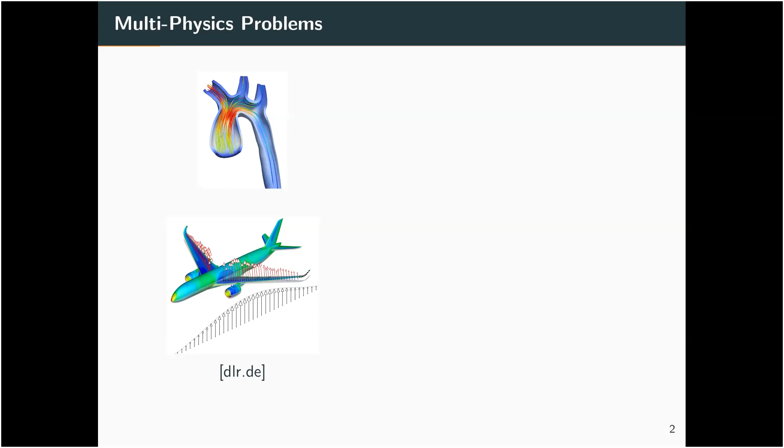Okay, let me start directly with multiphysics problems. These investigations study phenomena where more than one physics is involved. Here I have two examples. In the first example, we see the blood flow inside the human aorta. There we have the blood flow, which is representative of the fluid domain, and the aorta wall, which is the solid domain. The second example is the simulation of airflow around aircraft wings.

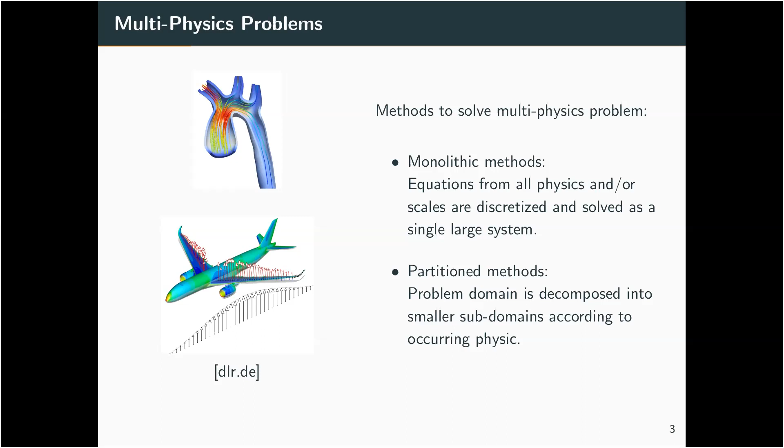To investigate these kinds of problems, there are generally two groups of methods: monolithic methods, where equations from all physics and scales are discretized and solved as a single large system. On the contrary, there are partitioned methods, where the problem domain is decomposed into smaller subdomains according to the occurring physics or scale, and for each subdomain an independent solver is used, and a coupling method is implemented for data communication between different solvers. We follow a partitioned method.

There are very good reasons to follow such methods. The first reason is that these methods give greater robustness and flexibility for software development. We are able to use well-adapted and validated numerical methods for each subproblem by using a partitioned approach. Also, previously developed and optimized single physics solvers can be reused here. Together these reduce the software development cost significantly.

We have some challenges when we use these partitioned approaches. The first challenge is that we need parallel single physics solvers. If we want very efficient simulations, the single physics solvers must be optimized at the first level. The second challenge is intercode data communication. Communication plays an important role in partitioned solvers because the boundary data must be exchanged between solvers, and efficient data communication is a key point here.

Boundary data mapping is also an important issue because not all solvers use the same mesh. Different meshes can be used by different solvers, and if those meshes are not matching, then we need to map the data between different solvers. Then there is equation coupling for strongly coupled simulations, where we have to use an iterative procedure for each time step. Without an acceleration scheme, the iterations can take forever. So this is also a very important issue.

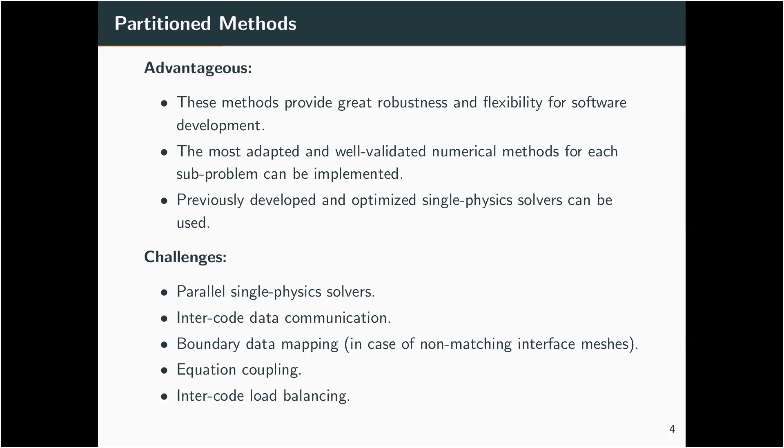And finally, intercode load balancing, which I'm addressing in this presentation. This is a different issue from what we know from classical load balancing inside a single physics solver. It says basically: if you have, for example, 10,000 CPU cores and two solvers, how should you divide these cores between your solvers so that it minimizes the idle time and maximizes the efficiency? In this presentation, I'm going to introduce a data-driven approach to address this issue.

Our goal is to design and implement an efficient core distribution scheme between solvers to minimize the waiting time. As I explained, in a partitioned simulation, available compute resources, meaning CPU cores or GPU cores, should be distributed among coupled solvers. You have 2 or 3 single physics solvers, and you have, say, 10,000 cores. You need to distribute these cores between your solvers. For partitioned simulations, solvers typically exchange boundary data at the end of each time step or iteration.

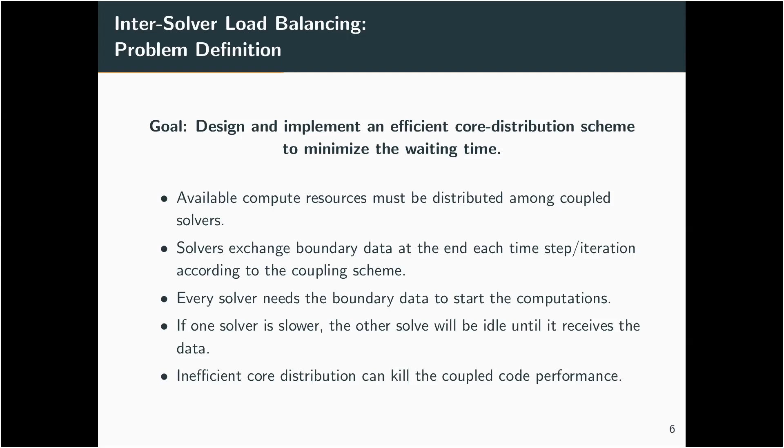This means that every solver cannot continue until it receives the boundary data from other solvers. If one solver is slower than the other, the faster solver will have to wait until the slower solver finishes its work and sends the data. This can kill the performance of the coupled framework if the distribution of cores and load balancing is not ideal. Therefore, I introduce a data-driven approach to address this issue.

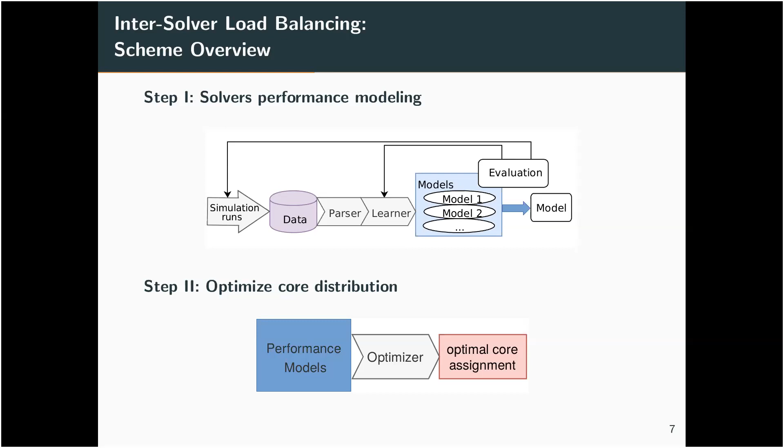The proposed scheme consists of 2 steps. In the first step, we model the performance of each solver. For this, we gather some performance data from small simulations, and then we use performance models, and by optimizing these performance models and choosing the best model, we select a good performance model for each solver. After finding good performance models for each solver, we can incorporate these models into an optimization problem to calculate the optimal core distribution between different solvers.

For performance modeling, we use PMNF, performance model normal form, regression. We use the method from the paper that I cited here in this slide. This regression suggests that we use such a formulation for modeling the performance of each solver. Here, F is the runtime of the solver, and P is the number of cores that we use. We can use different terms for the performance modeling. As I explained, F is the solver runtime, P is the number of processes, N is the number of approximation terms, C_k is the weight for each term, and i_k and j_k are empirical coefficients.

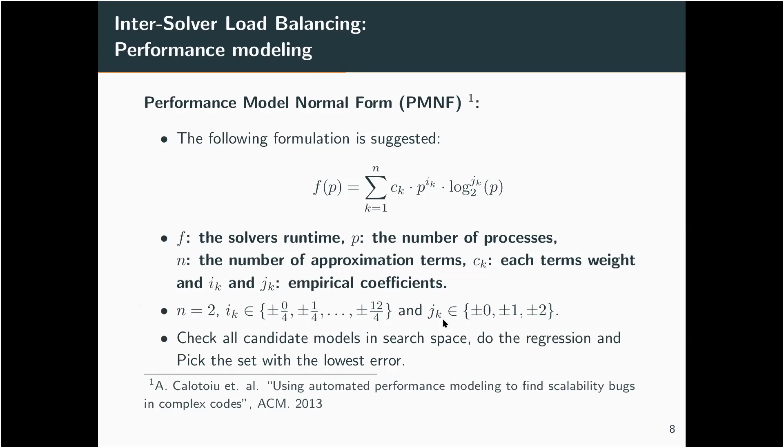For N and IK and JK, we can use this space. How we choose a good model is that we check all the combinations of N, IK, and JK, and just pick the model with the lowest error on a validation data set.

Okay, after finding the accurate performance model for each solver, we define our optimization problem. Here we want to minimize the capital F. The capital F stands for the total runtime, which is a function of the core distribution between solvers and other parameters. And we have one condition here: the sum of all cores assigned to all solvers should be smaller than the available number of CPU cores. This is an obvious condition that we have here.

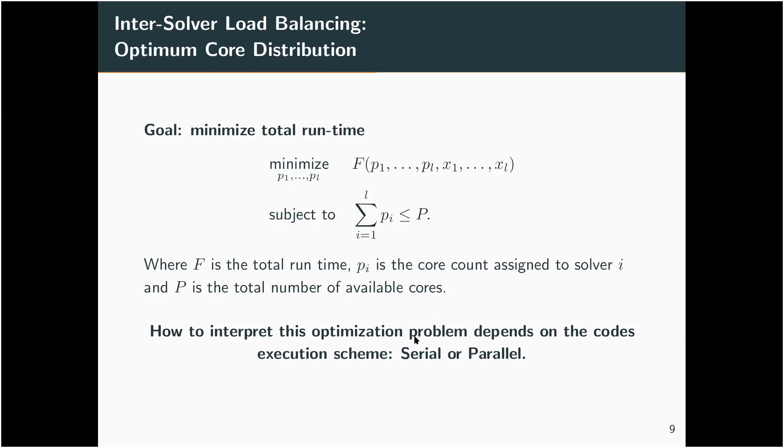On the other hand, if we execute the codes in a parallel fashion, then both solvers run at the same time, and at the end of the iteration, they exchange data. This also can be explicit, where no iterative procedure is taken, or it can be implicit, meaning that we have to iterate the simulation at each time step until it converges. So in this case, F is defined as the maximum of F1 and F2. Basically, it means that we should minimize the waiting time of one solver. This means that the different solvers should have runtimes as close as possible to each other.

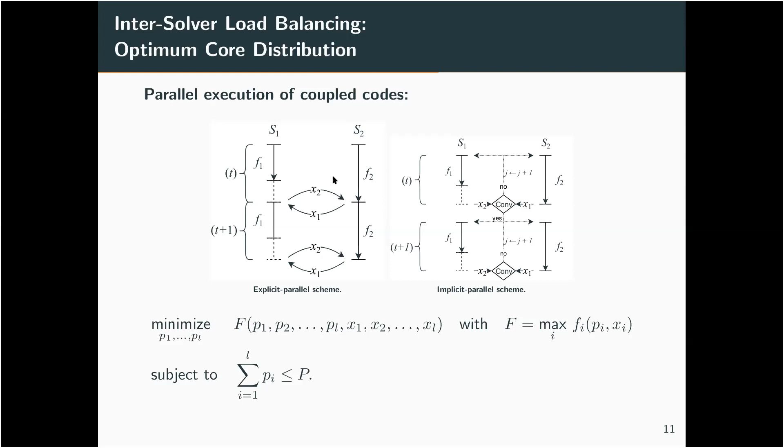Okay, now after defining the optimization problem, let's see how we can solve it. The point is, Fi's are not generally monotonically decreasing. This means that we can increase the number of cores, but the runtime of the solver can increase if it is outside the scalability region. In this case, the optimization problem can be a nonlinear, possibly non-convex integer optimization problem. If we limit the number of cores to the scaling range, then we can assume that Fi's are monotonically decreasing.

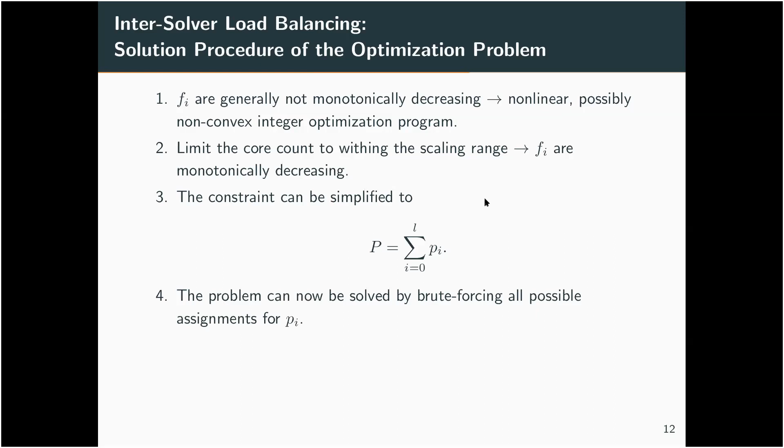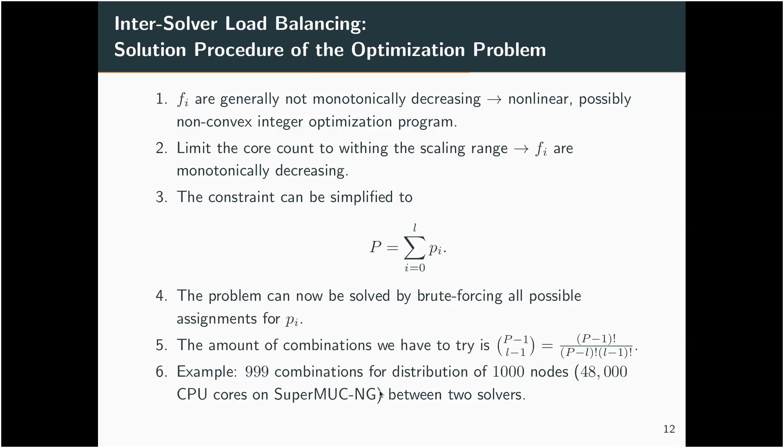So with this assumption, we can simplify our constraint to this. This means that we can use all our cores. We increase the number of cores, and the simulation time of each solver reduces. And by this, the optimization problem can be solved by brute forcing all possible assignments for Pi's. This is relatively cheap because, for example, if we have 1,000 nodes available on SuperMUC, this means 48,000 CPU cores. This is only 999 combinations if we have only 2 solvers. So this can be calculated relatively cheaply.

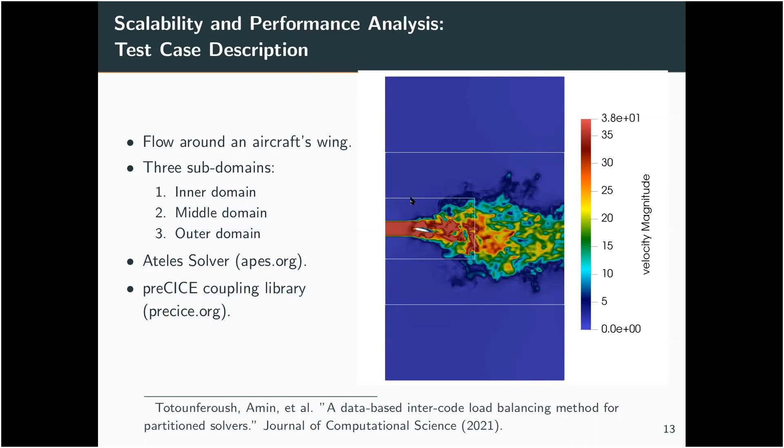Okay, let's have a look at a numerical example. I showcase the performance of a simulation of fluid flow around an aircraft wing. We divide the total domain into 3 subdomains: inner domain, middle domain, and outer domain. For each domain, we use an independent instance of the Ateles solver, which is a discontinuous Galerkin solver. And we use the preCICE coupling library for data communication, data mapping, and equation coupling at the boundaries.

Okay, for the inner domain, we solve Navier-Stokes equations. Our computational mesh has around 4 million degrees of freedom. For the middle domain, we use only the Euler equations. We have around 8 or 9 million degrees of freedom. And for the outer domain, we use the linearized Euler equations, which also has around 4 million degrees of freedom. For data communication between solvers, we use fully point-to-point communication via TCP/IP sockets. And for data mapping, we use the nearest projection method.

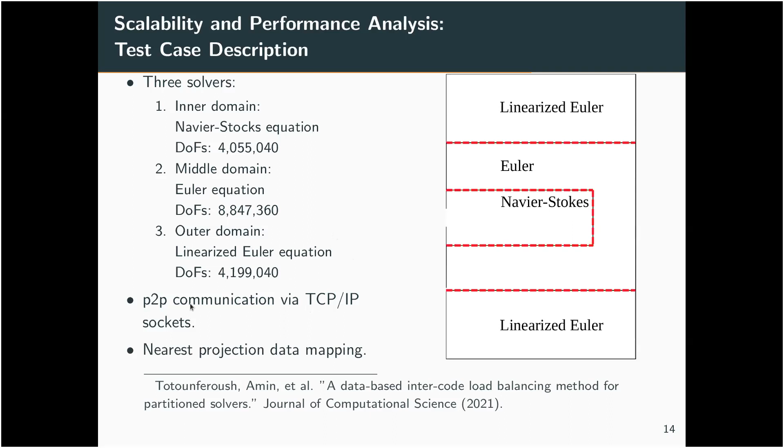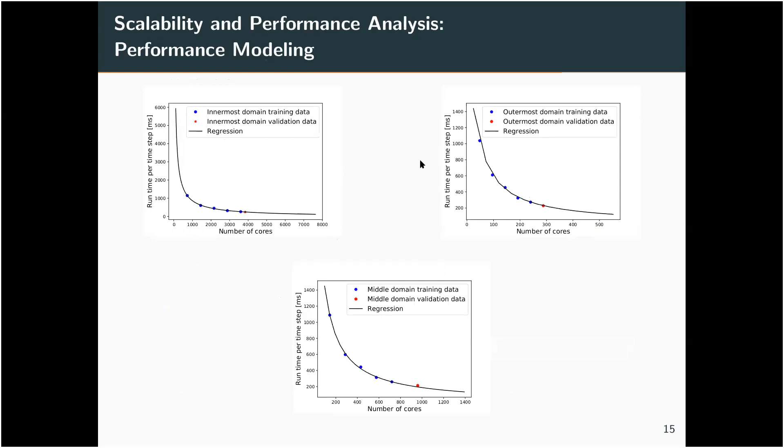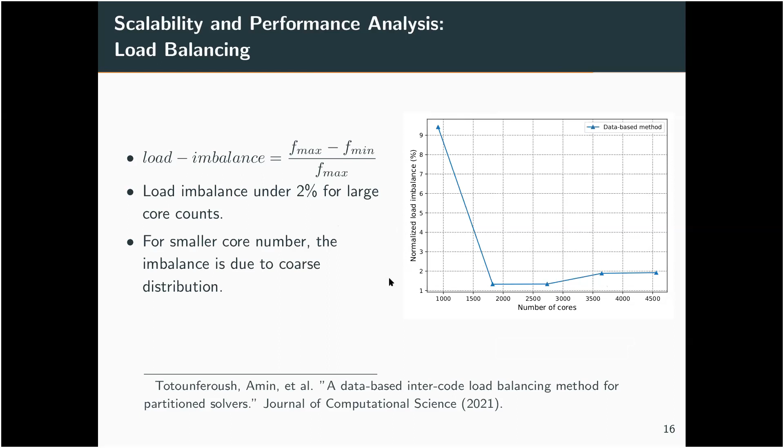Okay, let's have a look at the results. First, I show you the performance of the performance modeling for each solver: the inner domain, outer domain, and middle domain. Here I showcase the load imbalance between different subdomains. Up to 5,000 CPU cores, we have less than 2% load imbalance. For smaller core numbers, we see a larger load imbalance, because the distribution is not really fine since we cannot share a node between different solvers. So this is a machine limitation, not the method's shortcoming.

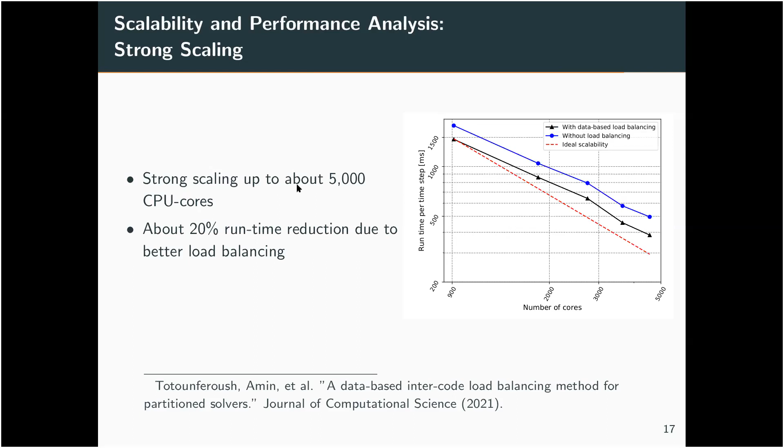Okay, let's have a look at the scalability. By increasing the number of cores, we see that the runtime reduces nicely. The blue graph is the case without load balancing, and the black graph is with the data-based load balancing that I explained. We see almost 20% runtime reduction due to better load balancing.

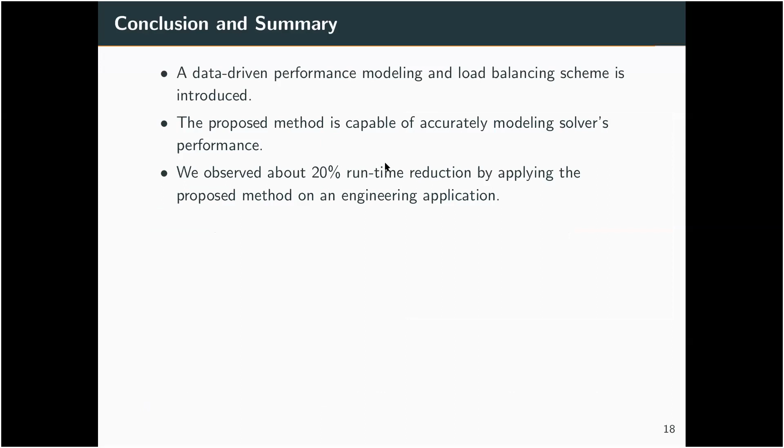In conclusion, I have introduced a data-driven approach for load balancing between different solvers in the partitioned approach. The method is able to accurately predict the solvers' performance and distribute the loads ideally between solvers; it reduces the runtime by 20%, and load imbalance is less than 2%. Here, we have ignored the communication cost because for this example it is low, but for communication-intensive applications, we have to consider it, for which we need multi-parameter modeling. Currently, neural networks are being investigated for this purpose.